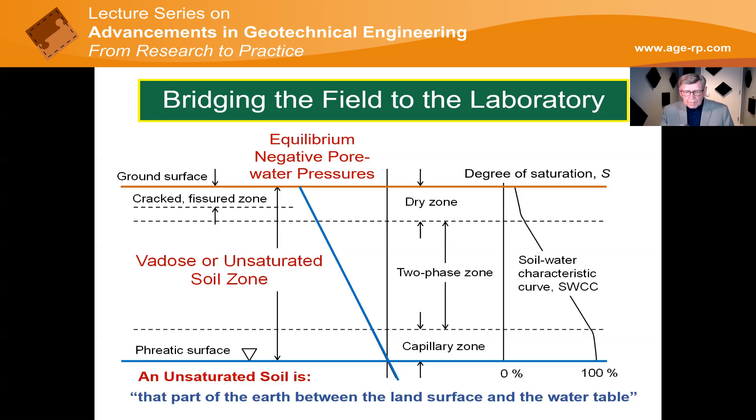In reality, though, we do not live in a world where the net moisture flux at the ground surface is zero, as I previously assumed. Rather, moisture is either falling on the ground surface as precipitation or leaving the ground surface as evaporation or evapotranspiration. This means that the ground surface constitutes a moisture flux boundary condition. There are several components to the ground surface moisture flux, and each component must be quantified independently when calculating the net moisture flux.

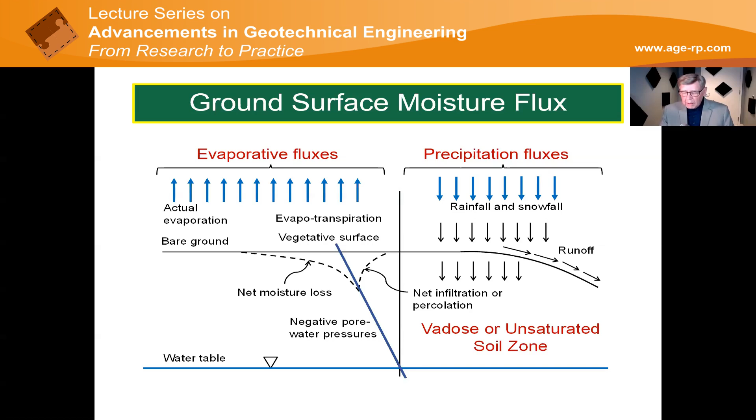Moisture flux at the ground surface disturbs or perturbs the pore water pressure line in the soil. Handling the moisture flux boundary condition at the ground surface adds a new challenge for geotechnical engineers, but it also opens the way for the study of a broad range of new problems that are of interest to geotechnical engineering.

The primary objective of this lecture is to propose geotechnical engineering protocols for the determination of unsaturated soil property functions, referred to as USPFs. These are constitutive relations that allow geotechnical engineers to simultaneously model the saturated and unsaturated soil zones of a continuum. The implementation of the proposed protocols must meet certain conditions.

They must not be too costly. They must be sufficiently accurate in order to add value to the project under consideration, and they must be anchored seamlessly to saturated soil properties.

The proposed protocols are estimation procedures that are made possible through the measurement of two unsaturated soils relationships, namely the soil water characteristic curve and the shrinkage curve.

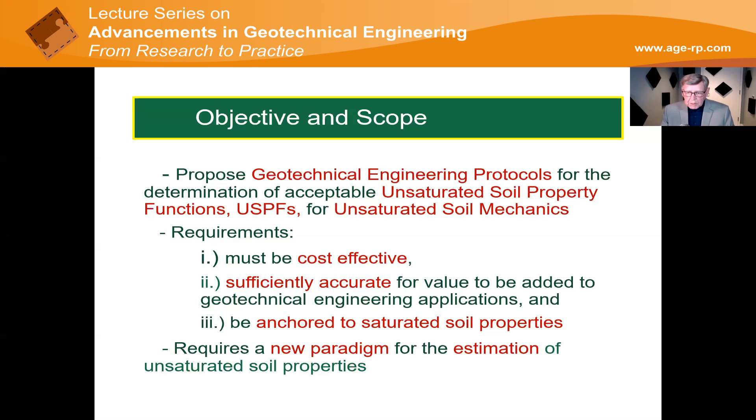The proposed estimation procedures require the adoption of a new paradigm, a new way of thinking on the part of geotechnical engineers. However, this new paradigm appears to be rapidly gaining acceptance in geotechnical engineering practice, as we notice the increase in research papers at engineering conferences related to the soil water characteristic curve.

Our desire as geotechnical engineers is to develop a science-based methodology for unsaturated soil mechanics. There are three primary so-called pillars that have been used with success in saturated soil mechanics, and they need to be available for unsaturated soil mechanics.

First, there needs to be engineering protocols. Protocols are procedures of practice that are based on sound theory and research studies that have been reported at conferences and journals from all around the world.

Secondly, there needs to be laboratory soil testing procedures that are not too costly to perform, but which provide the basic information needed for the estimation of unsaturated soil behavior.

Third, numerical modeling techniques need to be available since the soil properties are nonlinear and become part of solving nonlinear partial differential equations for which we need computer solvers.

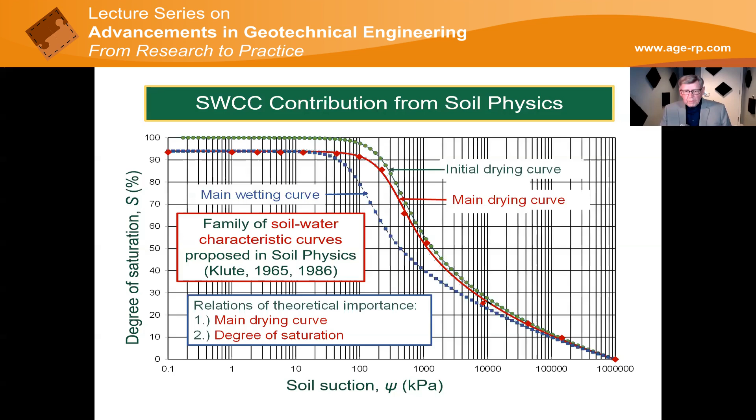And they were contained within the limits of the main drying and main wetting curves. The soil water characteristic curve was recognized to be complex in nature by our friends in soil physics. But still, it was realized to be of significant value in solving unsaturated soil processes.

Klute in 1986 described a number of features of the soil water characteristic curve that are proven to be of value in analyzing the behavior of unsaturated soils in general. I want to highlight some of his conclusions that are of value to us.

First, he stated, the soil water characteristic curve is a fundamental part of the characterization of the hydraulic properties of a soil, thus forming the basis for estimation procedures. Second, soil suction was explained to be an energy per unit volume, and as such can be referred to as a pressure.

Third, soil suction could be defined as matric suction up to around 1,500 kilopascals, and then as total suction in the range from 1,500 kilopascals to 1,000,000 kilopascals. Fourthly, the amount of water, he said, could be expressed in terms of a weight or mass basis, a volume basis, or degree of saturation basis.

Fifthly, the soil water characteristic curve was described as a family of curves that exhibited hysteresis, but it was suggested that unsaturated soil behavior should first be understood in terms of the main drying and wetting curves. This is a brief summary of Professor Klute's key findings.

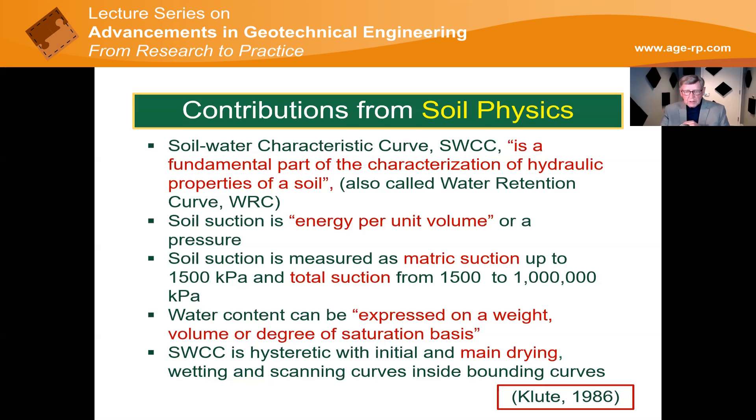The results of these two tests need to be blended together because the initial measured volume and mass conditions might be slightly different. Once the initial results are blended, all other volume mass versus soil suction relations can be computed. The entire analysis involves performing these two tests and calculating fitting parameters for unsaturated soil constitutive equations.

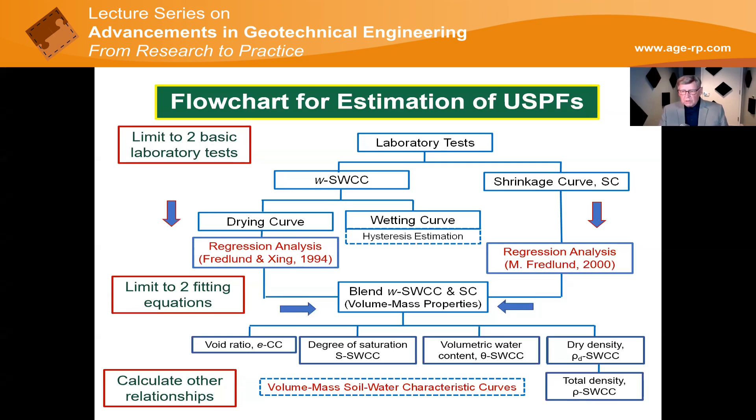Necessary calculations can readily be performed using an Excel spreadsheet, or they can be solved using the commercial software called SV Soils.

Actually, there are 3 tests required to obtain the basic soils information needed for calculating the unsaturated soil property functions. A pressure plate apparatus is needed to measure the gravimetric water content versus matric suction in the range from a few kPa up to 500 or 1500 kilopascals. Then the measurement of the total suction versus water content relationship is required for the high suction range, which requires the use of a vapor equalization technique. Another test involves the measurement of the shrinkage curve.

So these 3 tests provide a means of calculating all other volume mass soil water characteristic curves for the drying mode. The commercial cost to measure the combined drying soil water characteristic curve and the shrinkage curve on any soil is generally in the order of $1,200 to $1,500 US.

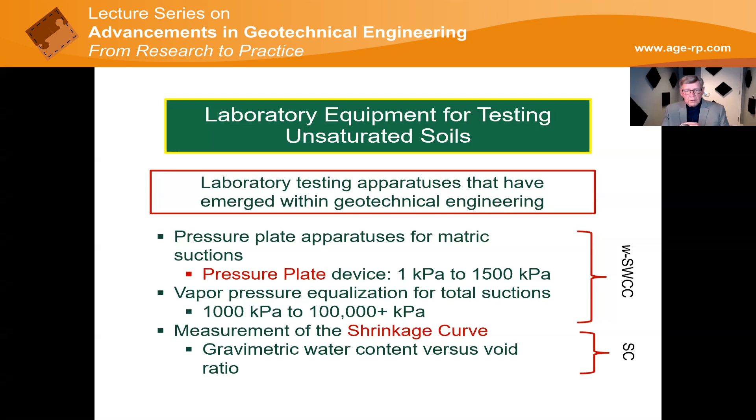The soil specimens tested are similar in size to those used for one-dimensional consolidation testing. 1 to 3 days are generally required for suction equalization under each applied suction.

A manufacturing company, GCTS, in Tempe, Arizona, has developed a pressure plate apparatus that extends the range of applied suctions to 1,500 kilopascals. The GCTS apparatus also has a number of special features.

First, a vertical total stress can be applied to the soil specimen under K-naught loading conditions. The applied total stress makes it possible to more accurately simulate in situ field conditions. But more importantly, vertical displacements can be measured and the overall volume can be calculated.

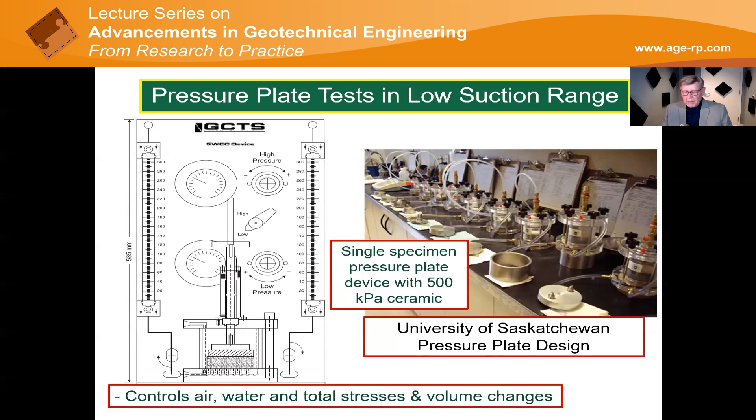The water volume can be calculated at any suction, and the diffused air volume can also be independently measured throughout the test. There have also been some other similar apparatuses built in other countries of the world, so this is not the only one available.

This slide shows soil water characteristic curves measured on 3 supposedly identical specimens of a low compressibility silt. Several points can be gleaned from examining the results. First, the results of all 3 tests can be shown to be very reproducible. Secondly, the air entry value from the drying curve is clearly identified to be about 10 kPa, and the residual suction can be seen to be about 120 kilopascals.

Third, the hysteresis drying curve and the wetting curve appear to be congruent or parallel on a semi-log plot, and they are, in this case, about 1/3 of a log cycle apart.

I would also note that each of the three soil water characteristic curve tests, drying and wetting, required about 2 months to perform. In other words, pressure plate tests are time consuming, and measuring both the drying and wetting soil water characteristic curves may not be acceptable for many geotechnical engineering projects.

However, I would note that the primary information required by the geotechnical engineer can be obtained from the drying branch of the soil water characteristic curve. By information, I'm referring to the air entry value, the rate of desaturation, and residual conditions.

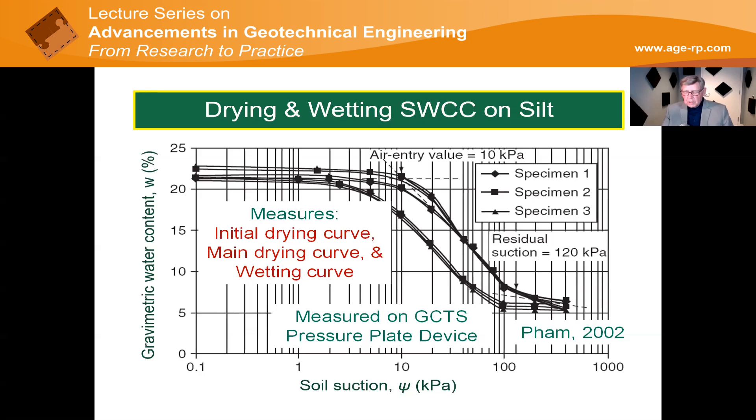The relationship between water content and total suction in the high suction range can be obtained using vapor pressure equalization on small soil specimens. The chilled mirror PotentiaMeter from Decagon, the company now called Meter, has proven to be very valuable for obtaining the necessary data in the high suction range.

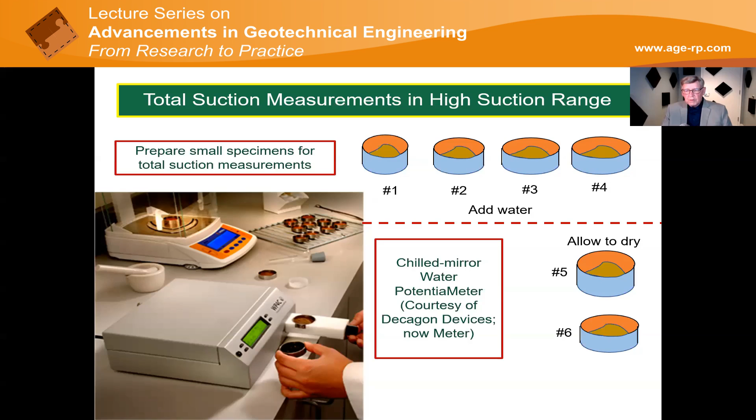The procedure involves preparing a series of small soil specimens at slightly different water contents. Some specimens are prepared by adding small but varying amounts of water, while others may be allowed to dry for varying elapsed times. Once moisture equalization has been achieved, each measurement of total suction requires only a matter of minutes. Suction measurements can be made in the range from a few hundred kilopascals to more than 100,000 kilopascals.

Let us now consider the steps that need to be followed for the interpretation of the main drying soil water characteristic curve data. Let us keep in mind that our final objective is to use this information for the estimation of unsaturated soil property functions.

Note on this graph that there is an arbitrary vertical line at 1500 kilopascals. Below this line, matric suction data are plotted versus gravimetric water content. Total suction data are plotted versus gravimetric water content for suctions greater than 1500 kilopascals. The two water content versus suction data sets constitute a basic thumbprint for the drying behavior of the soil.

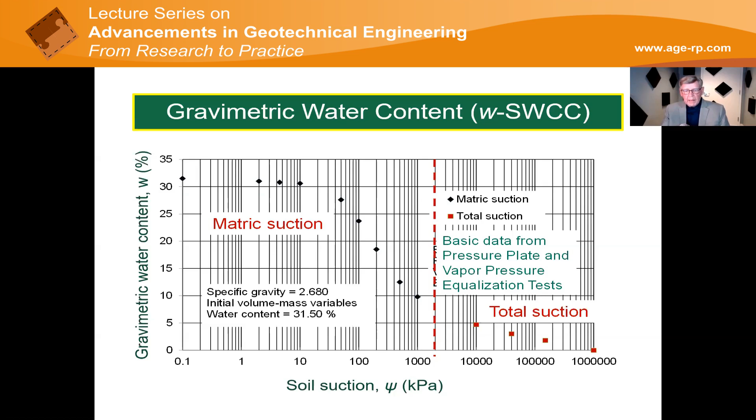At first, it may seem rather unusual to plot both matric suction data and total suction data on the same horizontal axis, but experience has shown that it works quite well. Now we need to find a continuous mathematical function that can be used to best fit the data set over the entire suction range from 0.1 kPa to 1 million kilopascals.

Most soils show a typical S-shaped sigmoidal behavior on a semi-log plot. I would also note that data on some soils shows a bimodal shape.

The 1994 Fredlund sigmoidal equation, along with a correction variable for high suctions, has been effectively used to best fit both unimodal and bimodal data sets. There are three fitting variables from the Fredlund and Xing equation that can be quantified using a regression analysis.

One variable indicates the inflection point, which in this particular case is 74.24 kilopascals. Another variable indicates the rate of desaturation, which in this case has a value of 1.573.

And there is a third variable that improves the general fit in the high suction range. The residual suction can be approximated to be about 1,000 kilopascals. I would note that other empirical equations could also be used to best fit the data, provided they fit adequately over the entire suction range.

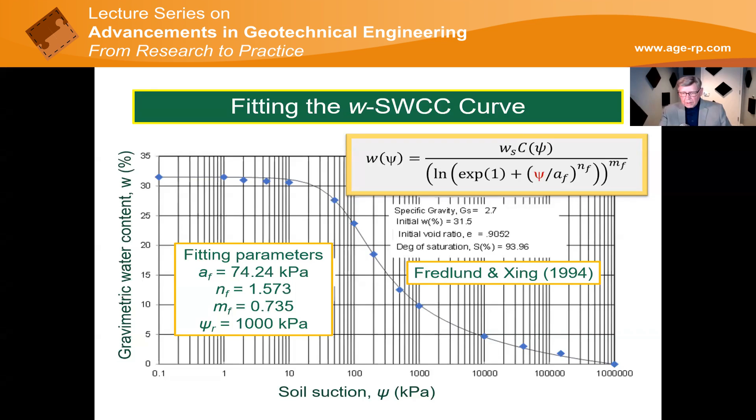An Excel spreadsheet can readily be programmed to perform best fit regression analysis on the experimental soil water characteristic curve data. This is done through the use of the data pull-down menu, which is part of the Excel software.

Many geotechnical engineers may not be familiar with sigmoidal types of equations. However, I would point out that most equations that have been proposed for soil water characteristic curve data are actually similar in form.

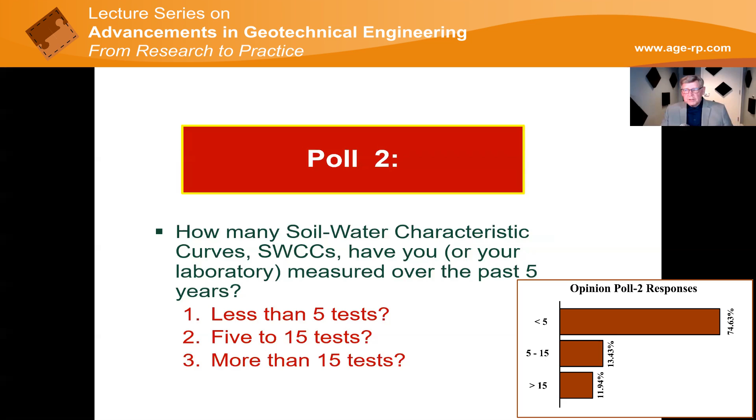Once the gravimetric water content versus soil suction data has been collected and analyzed, there's one important question that the geotechnical engineer must respond to. The question is as follows: does volume change occur in the soil as soil suction increases?

If the answer is yes, then it is important to also measure the shrinkage curve. On the other hand, if the answer is no, then the shrinkage curve is not required when analyzing the drying curve data. Historically, in soil physics, it has been common practice to always assume that there is no volume change in the soil as soil suction increases.

This assumption is not adequate for most geotechnical engineering applications because water content changes produce changes in 2 things: overall volume or void ratio, or changes in degree of saturation. Volume changes and degree of saturation changes constitute 2 different physical processes in the soil and must be independently taken into consideration for geotechnical engineering applications.

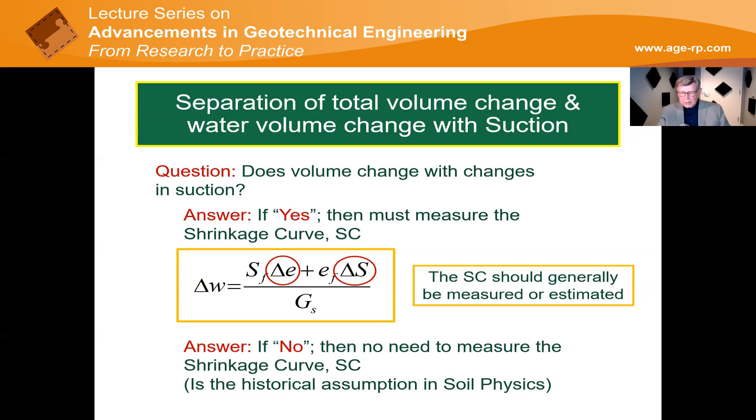Soil specimens for the shrinkage curve are commonly about 3 centimeters in diameter and about 1 centimeter in height. The soil water characteristic curve specimen and the shrinkage curve specimen are initially allowed to imbibe water until their matric suction reaches a 0 value. The shrinkage curve test specimens can be formed into a metal ring with an open top and bottom.

The specimen is then allowed to lose moisture through evaporation to the atmosphere. The diameter and the height of the shrinkage curve specimen can be measured at various elapsed times of exposure to evaporation. Usually about 2 sets of measurements can be made each day, and after a few days, the specimen can be oven dried.

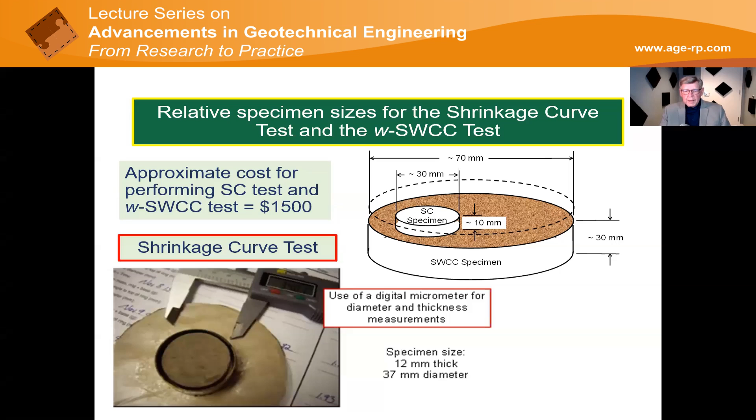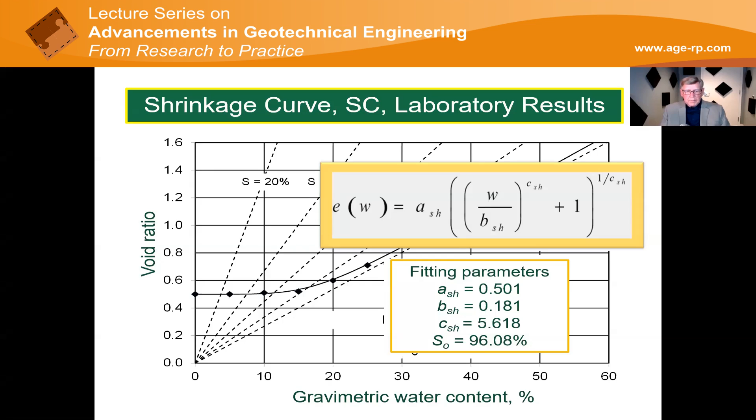It should be noted that in some cases it is sufficient to estimate the shrinkage curve based on the plasticity and the shrinkage limit of the soil.

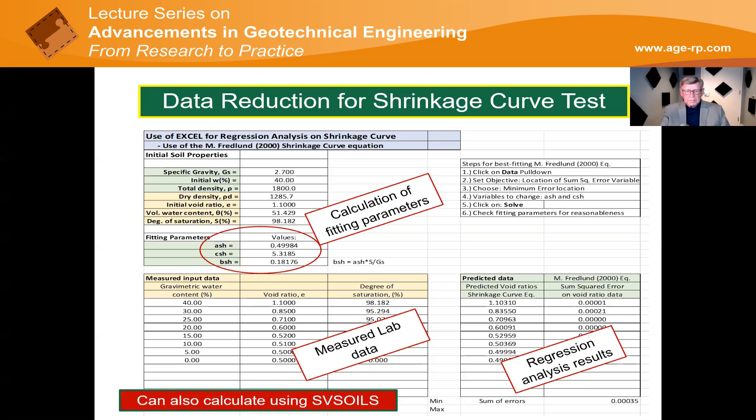With the soil water characteristic curve and the shrinkage curve represented as mathematical functions, it is now possible to move towards calculating other volume mass versus suction functions. For example, it is possible to calculate the void ratio versus suction relationship, the volumetric water content versus suction relationship, degree of saturation versus suction, and other functions such as dry and total density versus suction.

However, the primary objective of the analysis is to define unsaturated soil property functions, such as the permeability function, the water storage function, the shear strength function, volume change functions, as well as other material property functions.

Taking hysteresis into consideration involves repeating the above-mentioned calculations, this time using estimated or measured wetting branch data for the soil. It is beyond the scope of this lecture to do more than briefly describe how hysteresis might be accommodated. I will say a few words later.

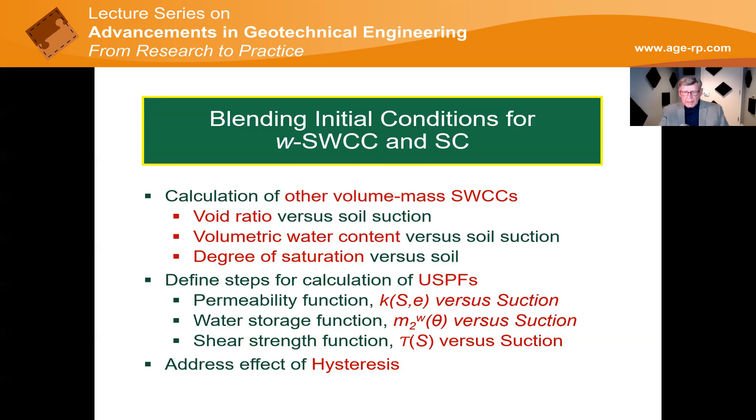The first unsaturated soil property function to be calculated and plotted is the void ratio versus soil suction. This function is obtained by substituting the shrinkage curve equation into the gravimetric water content versus suction equation.

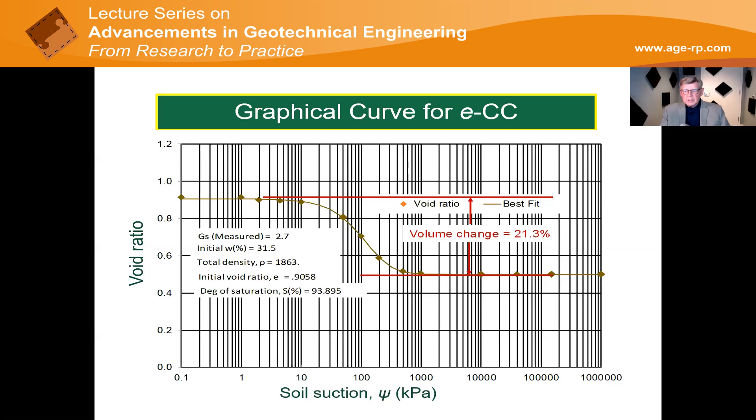The plotted results on this slide show volume change starts to occur in the soil when the suction reaches a value of about 20 kilopascals. And most of the volume change ceases when the soil reaches about 300 kilopascals. The total volume change upon drying can be calculated to be about 20%.

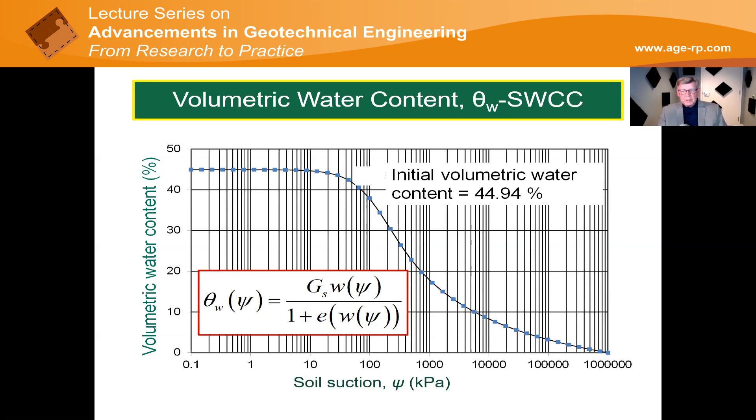The volumetric water content versus soil suction function can be obtained by combining the gravimetric water content soil water characteristic curve and the shrinkage curve, as shown by the equation on the slide. The volumetric water content versus suction provides a convenient form for defining water storage of the soil. The volumetric water content embraces both overall volume change and changes in degree of saturation as suction is increased.

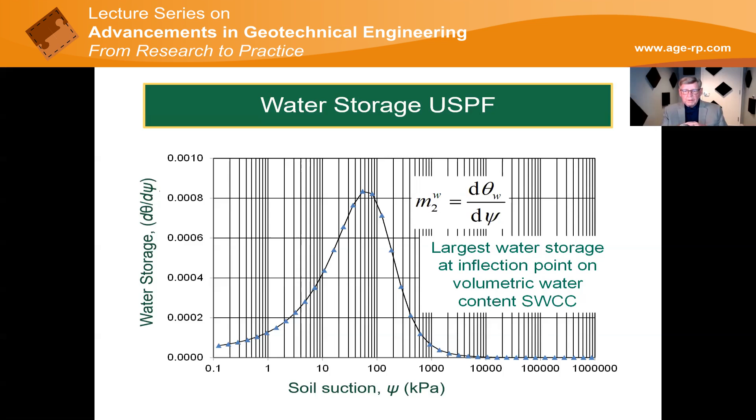Water storage is defined as the slope of the volumetric water content function. Therefore, the water storage function can be obtained by differentiating the volumetric water content versus suction relationship. The water storage function can be seen to be highly nonlinear, with relatively low values in the low and high suction ranges. The maximum water storage occurs near the inflection point of the volumetric water content function.

Probably the most important volume mass relationship is the degree of saturation function. The degree of saturation function is equal to the gravimetric water content function divided by the shrinkage curve equation, while marching forward with the increases in suction to a maximum value of 1 million kilopascals.

Physical properties such as the coefficient of permeability are known to change very significantly and very rapidly with changes in degree of saturation. The calculated degree of saturation versus suction relationship, once it's calculated as a series of data points, can once again be refit with the Fredlund and Xing equation, yielding a continuous function for the degree of saturation. In fact, all volume mass versus suction functions can be best fit using the same Fredlund-Xing 1994 equation.

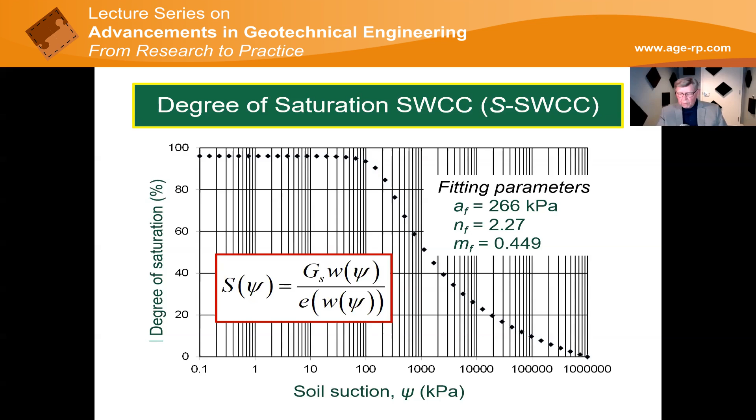The degree of saturation function can be replotted using a log to the base 10 scale on the abscissa. This way, the suction is converted to a linear scale, making it easier to calculate the true air entry value of the soil. The air entry value is defined by drawing a line tangent through the inflection point, and where it intersects the horizontal line through the low suction range data defines the true air entry value.

In this case, the air entry value is 147 kilopascals, a much larger value than observed on the gravimetric water content function.

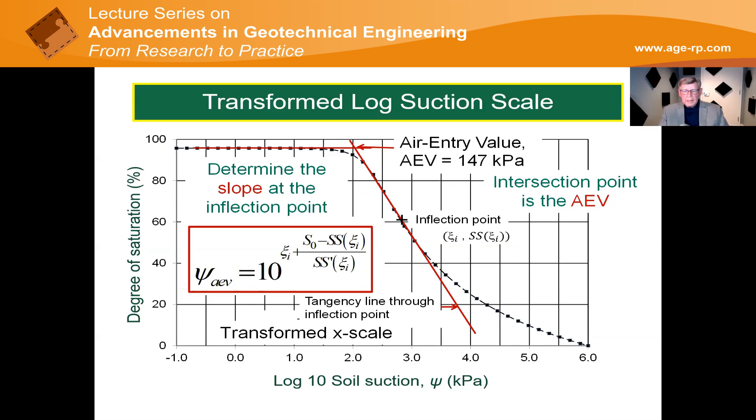It is also possible to derive a closed form equation that will allow you to calculate the air entry value, as shown on this slide.

It is important to pause at this point to ask the question: why do I need various volume mass versus suction relationships for the soil?

The primary difference between saturated and unsaturated soil water seepage analysis lies in the fact that the properties have the form, for an unsaturated soil, of being nonlinear functions. This has the effect of making the solution of the partial differential equation iterative in nature.

In other words, values for the soil properties must be first assumed while solving for the hydraulic heads, H, at all nodes in the finite element grid. Then the soil properties must be upgraded, and once again, the partial differential equation has to be solved for new hydraulic heads and pore water pressures. The process is continued until convergence is achieved.

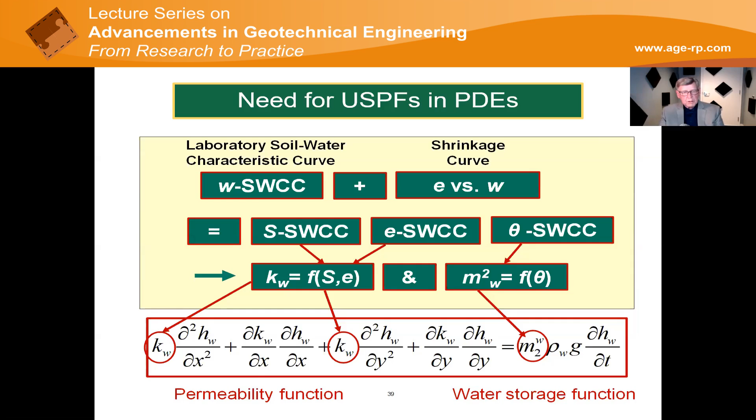On this slide, you can see that permeability can be a function of degree of saturation and void ratio. Water storage is a function of volumetric water content. So you see why we need those two laboratory tests.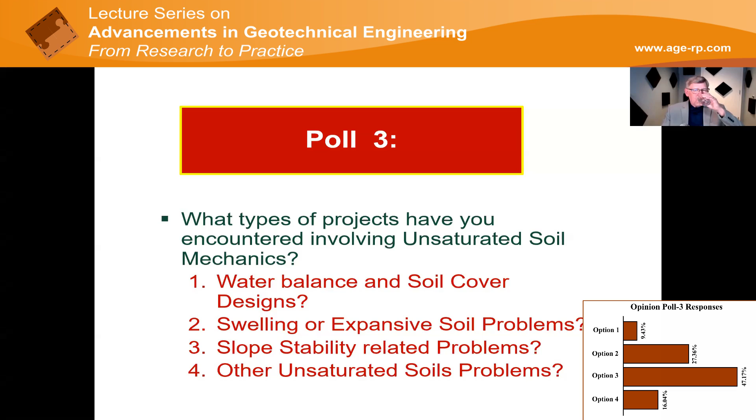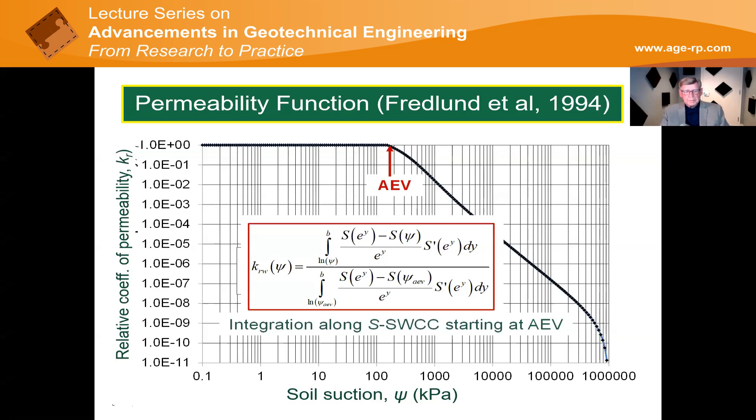The next slide shows that. This slide shows the relationship between the relative permeability function and the actual permeability function. The actual saturated coefficient of permeability for the soil was assumed to be 1.0 times 10 to the minus 2 meters per second.

This actual permeability function applies for the drying process of the soil. This graph also shows the importance of accurately identifying the true air entry value of the soil. The soil behaves essentially as a saturated soil as long as the air entry value is not exceeded in the soil.

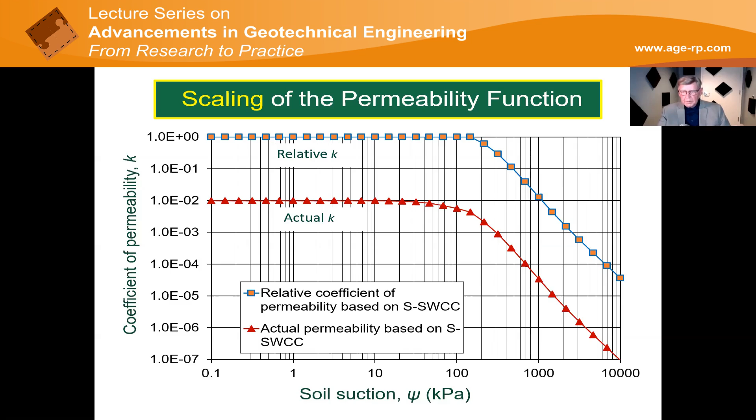Let me now give consideration to the hysteresis effect associated with wetting and drying processes. First, it should be noted that the effect of hysteresis on the permeability function can be estimated based on the hysteresis loop associated with degree of saturation versus suction.

Let us suppose that the magnitude of the hysteresis loop can be quantified by the shift in the inflection point, and let us assume that the drying and wetting branches of the degree of saturation soil water characteristic curves are congruent. The xi value in the equation at the bottom is simply the equation you can use that allows you to indicate how much of a hysteresis loop and quantify it as a percentage of a log cycle.

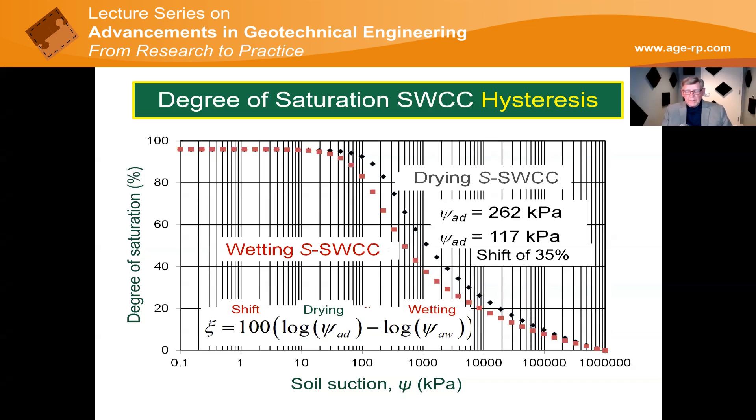The shift in the wetting curve in this slide is assumed to be 35% of one log cycle. So if that is the wetting curve, let us now recalculate the permeability, the wetting curve permeability function, and it'll be shown on the next slide.

The drying and wetting branches for the corresponding permeability functions are shown here. The estimated permeability functions are based on several assumptions and are by no means a rigorous formulation. However, they provide a starting point that is acceptable when considering the effect of drying and wetting on the coefficient of permeability.

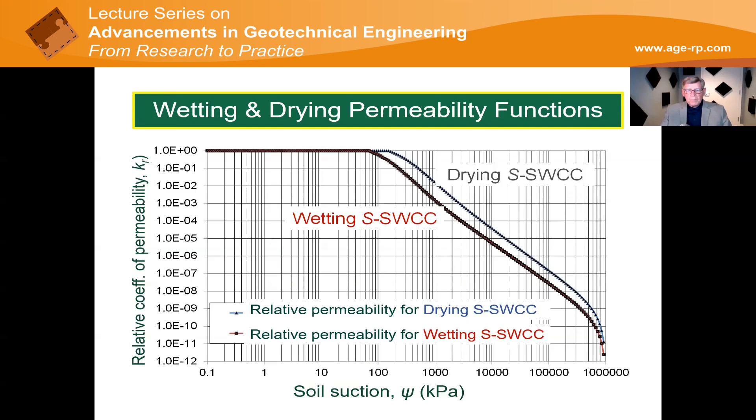My lecture is mainly focused on the application of soil water characteristic curves to seepage problems. However, before I close, I would like to illustrate the application of the soil water characteristic curve for the estimation of shear strength of an unsaturated soil.

It has long been observed that the shear strength of an unsaturated soil is related to the degree of saturation. Research studies have shown that the soil behaves as a saturated soil up to the true air entry value. At this point, the shear strength envelope becomes tangent to the saturated shear strength envelope, and then it starts to bend over. It has also been observed that the slope of the shear strength envelope approaches zero near residual suction conditions. These two points are really anchor points, and they are estimated from the soil water characteristic curve.

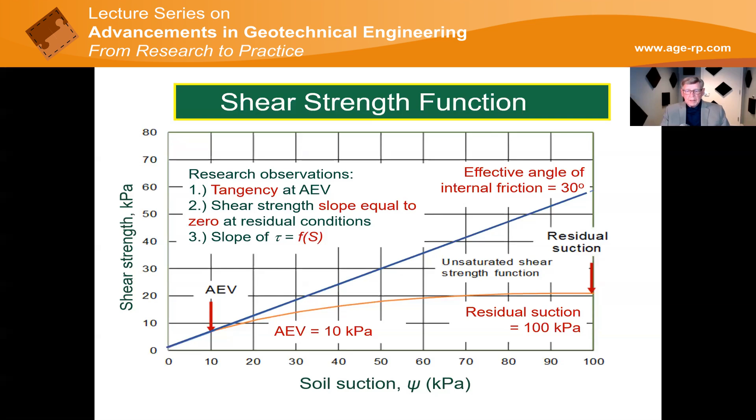We use the soil water characteristic curve, the degree of saturation branch, to give us the anchor points on the shear strength envelope.

As I conclude my lecture, I realize that I've had you sign on to many assumptions as well as some new theory. However, I strongly believe that the path forward, by path forward I mean the implementation of unsaturated soil mechanics in geotechnical engineering practice, must involve the use of smart approximations and assumptions based on research studies that have been undertaken and published at conferences and in journals around the world.

I am convinced that the w soil water characteristic curve and shrinkage curve provide sufficient information for the determination of all volume mass soil property functions. And I'm also convinced that unsaturated soil property functions such as permeability, shear strength, and volume change can be estimated with sufficient accuracy for most geotechnical engineering applications.

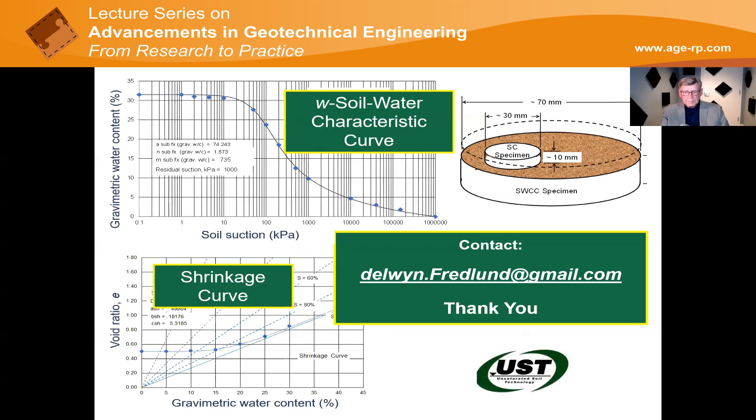I would be willing to answer any questions you may have.

What is the difference between the pressure plate test in the low suction range and the triaxial test?

There is no difference, because in the triaxial test you're going to still install the air entry value, high air entry value disc in the base plate of the triaxial cell. And in either case, when you're using a pressure plate or triaxial, the volume change associated with changing suction is going to be three-dimensional. So whether you put it in a pressure plate or a triaxial cell, you should get essentially the same water content versus suction relationship.

Well, I think I know what you're talking about. Yes, if you get to a completely dry condition, all of those soils should dry to zero water content at 1,000,000 kilopascals. At lower suctions, before you get to 1,000,000, the curves will tend to converge. It is a little bit like taking a soil and saying the soil has a pre-consolidation pressure. But here it's not the pre-consolidation pressure, it's the air entry value that tells you when the curve will bend downwards. So they might start at different initial void ratios, and as they pass the air entry values, which will not necessarily be that different, they will tend to converge onto the same curve. I think that's what you were asking, and that's my answer.

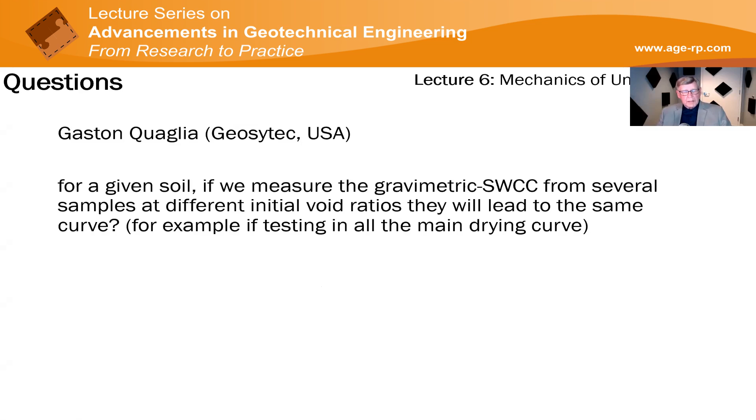I think you're referring to the difference in the size of the sample you use for measuring the soil water characteristic curve. It's about the size of a consolidation sample, and the shrinkage curve sample is much smaller. Is there a difference? Is it a problem, this size difference? And the answer is no, not really.

You see, the size of the shrinkage specimen was really dictated by the original shrinkage limit test. The reason they took a small sample was in order to have an intact portion of the sample without a crack, because if a crack forms in the specimen you can't measure the volume very well. So it was purposely made smaller so you could have an intact portion, and the most important value on the whole shrinkage curve is the minimum void ratio of an intact piece of soil. You can have the shrinkage curve done on a small specimen and the soil water characteristic curve on a large one, and I don't think there's any inconsistency. But it'd be worthy of further research. That's the reason why we use a small sample, to get around the cracking problem.

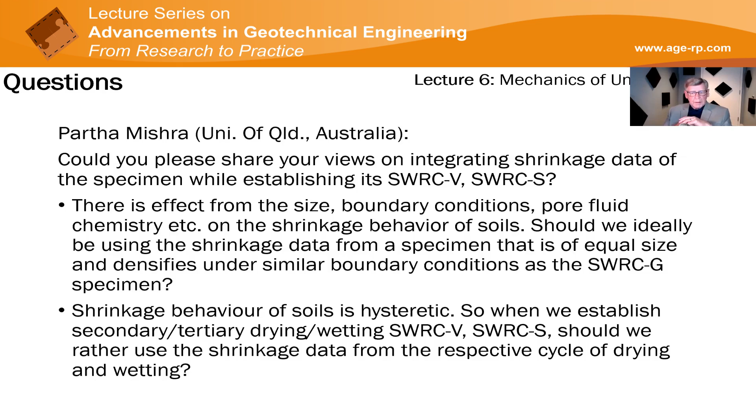Yes, consolidation behavior is different. Consolidation has its own characteristics. The consolidation curve may have a pre-consolidation pressure, it may be reloading. All those are characteristics of it. As far as drying is concerned, it may not even care about the pre-consolidation pressure. The air entry value is an independent variable. So there are differences, yes. Next.

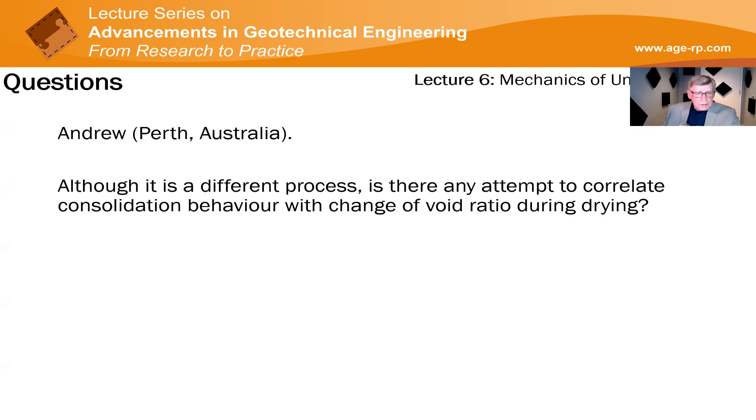The physical meaning of air entry value - the meaning that is most meaningful to us as geotechnical engineers is the value where air starts to enter the biggest pore in the soil. It's very difficult to identify exactly what that suction would be, so we use an empirical construction in order to define the air entry value.

It makes most sense to define it on the drying curve, from the degree of saturation drying curve, because that is the point at which air enters. Now, I showed more than one - an initial drying curve and a main drying curve. You could do the air entry value on either of those two, and usually they're just about the same value.

Importance of unsaturated soil considered in seismic geotechnical design. There are questions related to unsaturated soils and seismicity that, as far as I know, have not been fully addressed yet. Even questions asking what's the difference in seismic behavior if the soil has some air, if its degree of saturation is low - how does it affect liquefaction? How does it respond to seismic loading? I think the research is still to be done on that. I have nothing to really add about it. I just know it's an area needing research.